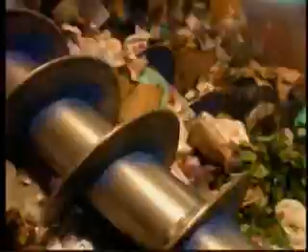Waste can be a resource and not a problem. This is the approach that inspires today's treatment methodologies. The goal is to maximize recycling in terms of both secondary materials and energy recovery, as well as to minimize the environmental impact of processing plants.

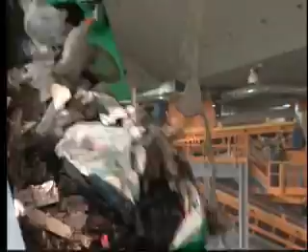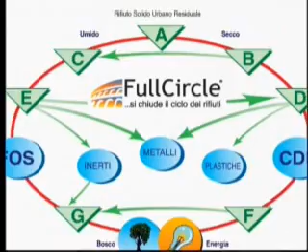In this perspective, disposal facilities are now virtuously evolving into integrated systems of treatment. The FullCircle is an integrated system of treatment aimed at making the best possible use of the waste generated by both citizens' consumption and production systems. It's a flexible system capable of either adapting to a future where wise political and industrial choices will lead to waste quantity reduction and quality upgrading, or effectively tackling the existing problems.

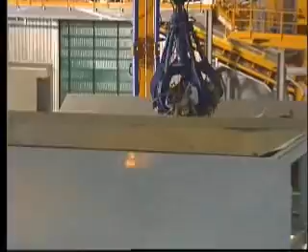The principle from which our system draws inspiration is the so-called rule of the 3 R's: reduce, reuse, recycle. Rejects that are considered a problem are, on the contrary, the resource that is the substance of our system, the purpose of which is to implement the 3rd R, recycle.

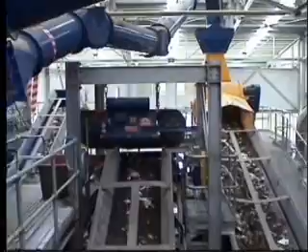Waste fractions from source-separated collections, such as glass, metals, paper, and plastic, can be reintroduced as secondary materials into their respective production cycles. Mixed waste that didn't go through source-separated collection is bound to mechanical biological treatment plants, where it's separated through mechanical sorting processes into different fractions.

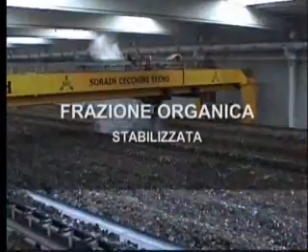Recyclable materials, such as metals and plastic. Stabilized organic fraction. Combustible fraction. 1 ton of RDF has the same energy content of approximately 3 oil barrels.

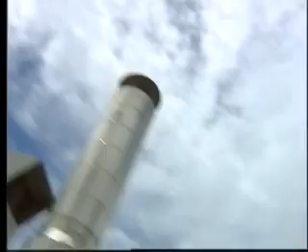Energy recovery is a decisive factor for both the economic result and the environmental protection connected with conservation of conventional energy resources. However, being RDF a non-conventional fuel, it can be used only in specially provided plants, capable of guaranteeing the total absence of danger for public health and the environment.

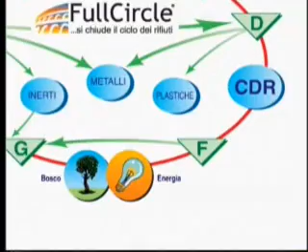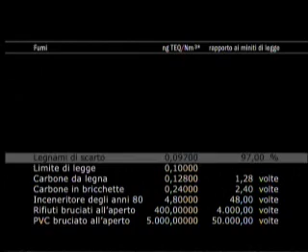All available processes and technologies have been evaluated in order to select the most qualified thermal treatment to fit and complete the FullCircle. The fundamental criteria that led to the selection were the effectively proven safety and reliability, with the purpose of ensuring a fully sustainable environment, mainly concerning the most dangerous components like dioxins.

Based on European regulations currently in force for incineration plants, municipal waste burning in the open air, which means uncontrolled, may generate dioxin concentrations in the fumes up to 4,000 times higher than the accepted limit, while gasification technology allows concentrations approximately 2,000 times lower, on the verge of non-measurability.

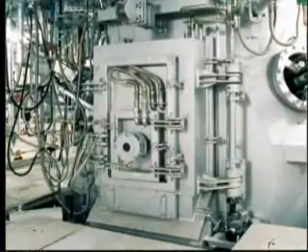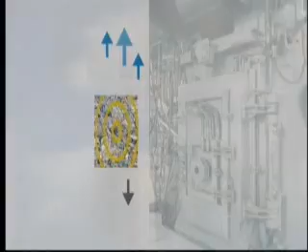Gasification is a molecular dissociation process induced by temperature. Materials in their solid state are subjected to physical and chemical transformation processes in order to sort out the combustible fraction from the inert fraction, to reach a condition more suitable for energy production: gas. By way of example, bear in mind the difference between a power plant fed by coal, solid, and methane, gaseous.

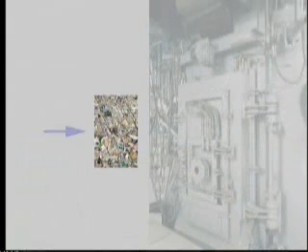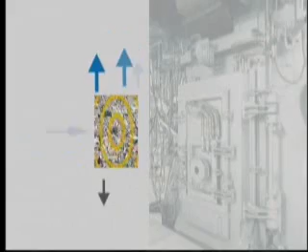Even the most resistant organic compounds decompose at high temperatures, completing the transformation into gas of all the combustible fraction without constituents in a liquid or steam condition, the tar. The process products are gas and vitrified inert matter.

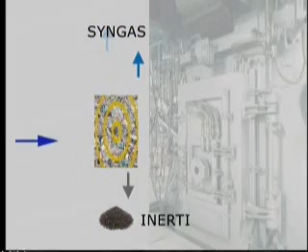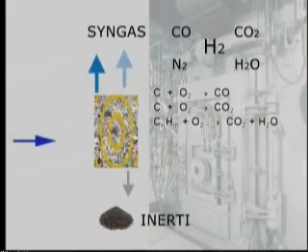Regardless of the starting materials, the combustible gas, syngas, at a macroscopic level consists of hydrogen, carbon monoxide, carbon dioxide, nitrogen, and water. The main reactions occurring in the gasifying section are exothermic formation of carbon monoxide and carbon dioxide, fission endothermic reaction, and in an atmosphere enriched with water vapor, shift and water gas endothermic reactions.

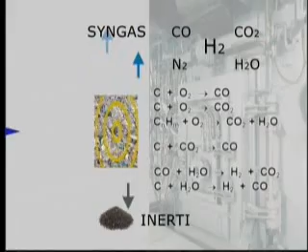Gasification plants represent a cutting-edge solution offering fully industrial applications. In order to evaluate the state-of-the-art in the thermal treatment of waste, the Japanese experience was examined.

The geographical and demographic conditions have heavily obstructed land filling and also forced plant implementation in populated areas, which is why environmental issues are a very real concern. In addition, Japan is a supporter of the Kyoto Protocol and has identified one of the greenhouse effect reduction factors in energy production from waste.

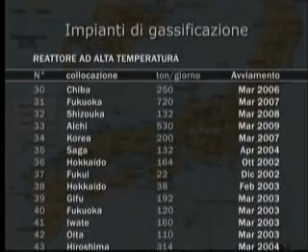In this context, the development of waste treatment systems has been strongly stimulated, and the country's wealth and technological level have allowed extensive research and development activities. The most suitable process to achieve this goal has been identified as gasification.

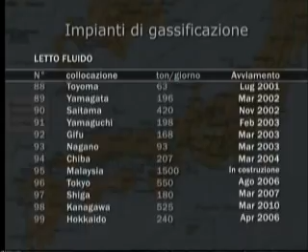Since the year 2000 in Japan, orders for gasification plants have overcome orders for incineration plants. Presently, gasification process plants in operation or under construction number 107. Among the thermal treatment plants ordered in the year 2006, gasifiers' percentage reached 75%.

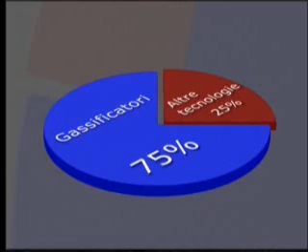Fukuyama is the sixth plant built applying the technology of the Japanese group JFE. The treatment capacity of the plant is 314 tons per day of RDF, and the electrical power generated is 20 megawatts. The RDF is fed to the gasifying and melting reactor.

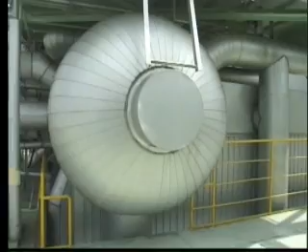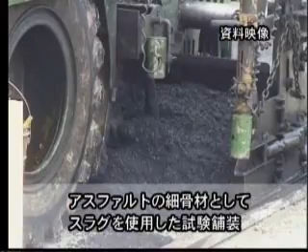The gas obtained is utilized in a boiler to generate steam that's used by a steam turbine for the production of electrical power. The vitrified slag is taken out from the bottom of the reactor. It can be used for road construction or for other applications in the building industry.

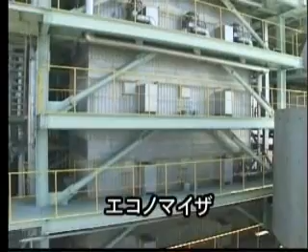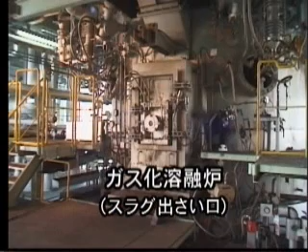After the combustion, the gas flows through an economizer to complete the energy recovery, and then is sent to the purification plant. Dust and ashes are collected and recycled back to the gasifying and melting reactor.

JFE's gasifying and melting reactor could be divided into three zones. Zone 1, for gas treatment in high temperature, reducing atmosphere. Zone 2, for fluidized gasifying and pyrolysis. Zone 3, for high temperature combustion and reduction melting.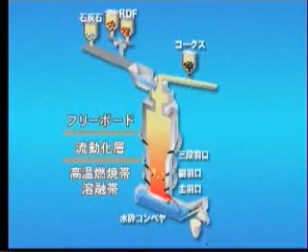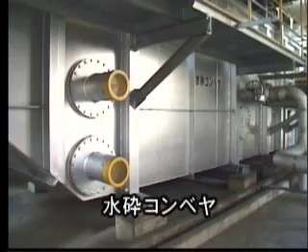Three levels of air injection are placed in the reactor to maintain the appropriate temperatures for the gasifying process. The molten slag flows out from the bottom of the reactor to a water bath, where it instantly cools down, producing a vitrified and granulated material.

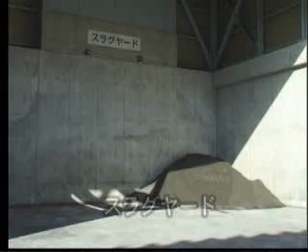A transportation system collects the granulate from the bath, dividing possible metals from the minerals. Finally, the materials are stored in two dedicated areas. The minerals, shaped as sand, will be used as construction materials. The metals will be melted and recycled.

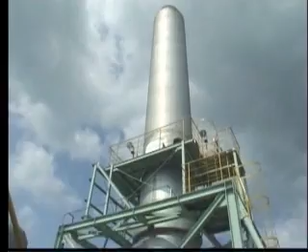From the rigorous controls of the Japanese authorities, it's clear that the gasifying process is extremely effective against dioxin formation.

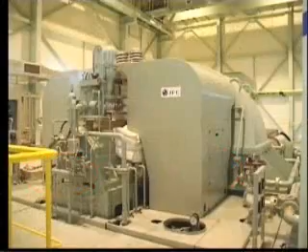The electrical power produced is sold to the grid and used to feed the entire facility, including the RDF production plant.

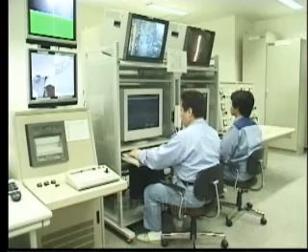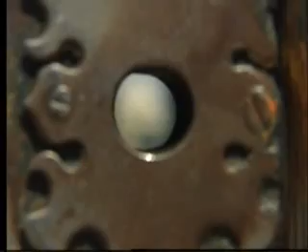A computerized control system runs the entire plant, monitoring and controlling each step of the process in real time, making it safe and reliable. It was logical that the first implementation of the FullCircle system should be realized in Rome,

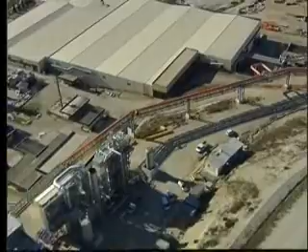in the city of environmental industries of Malagrotta, where a mechanical biological treatment facility for mixed waste is already in operation, producing a quantity of RDF equal to 30 to 35% of the processed waste.

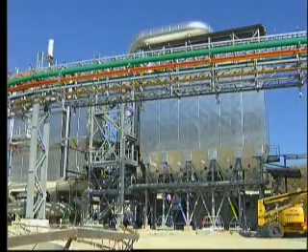The construction of the gasifier is subdivided into two phases. The first one will be dedicated to the implementation of one gasification line and a steam cycle for energy production. During the second phase, two additional lines, one of which in standby, and a combined cycle with a gas turbine will be implemented. This will be the first realization of its kind in the world.

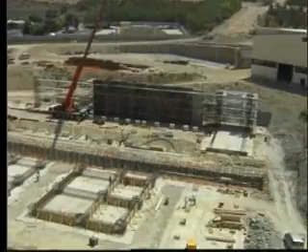Electromechanical works were started on February 15, 2007, and plant tests of the first phase began a few days ago. Because of the technological solutions that have been adopted, the Malagrotta gasifier will be a preeminent reference point worldwide.

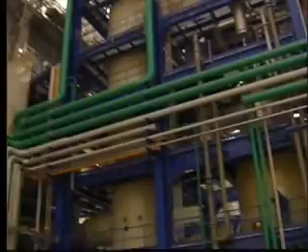It will be fitted with a synthesis gas scrubbing section and will be equipped with a hydrogen production unit for fuel use. A hydrogen filling station open to the public will be installed near the biomethane station already present at Malagrotta. Again, this is the first case in the world of cars fueling with hydrogen produced from waste.

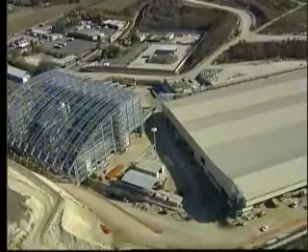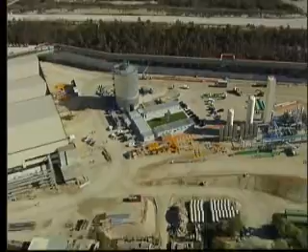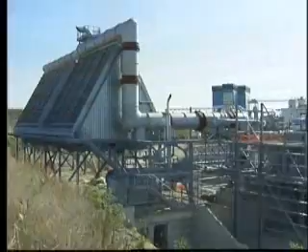The power station is divided into four areas and is greatly integrated into the industrial and operational context that already exists at Malagrotta. Area A, where gas is produced and scrubbed. Area B, next to the biogas turbines already in operation, where electric power is generated.

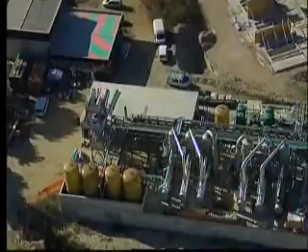Area C, dedicated to oxygen production needed by the process, is placed in a barycentric position with respect to the premises where all general utilities have been concentrated. Area D, where the percolate extracted from the landfill is purified and transformed into industrial water necessary for the site.

Once more, a problem which is transformed into a resource. The data from the emissions monitoring systems will be available on the web in real time and will be freely accessible by the public. A second FullCircle project has been submitted to the city of Albano by AMA, Acea and Pontina Ambiente.

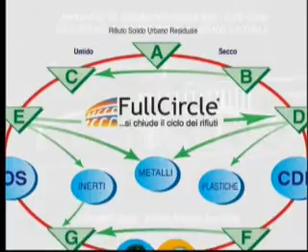The plant is expected to be located in the industrial area of Cecchina at Roncigliano, next to the existing plant for the mechanical biological treatment of mixed municipal solid waste serving the Castelli Romani area. FullCircle: from RDF, to gas, to energy.